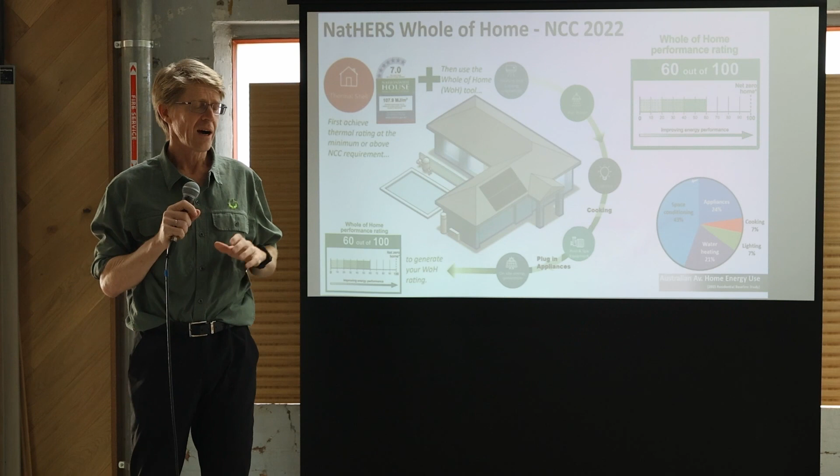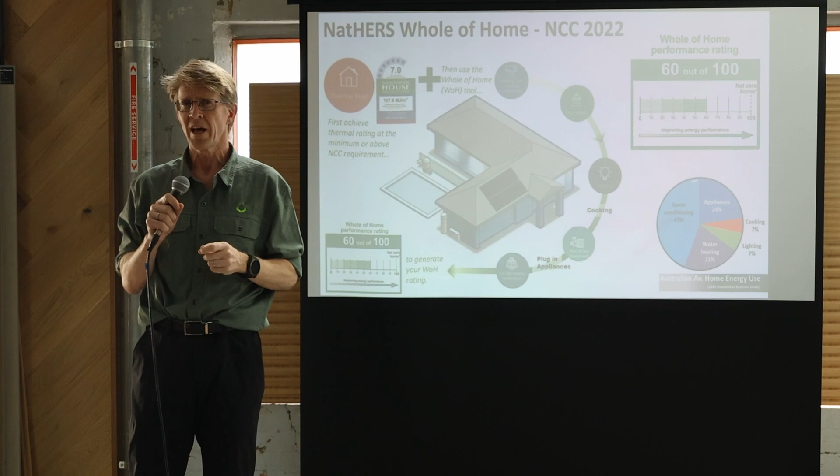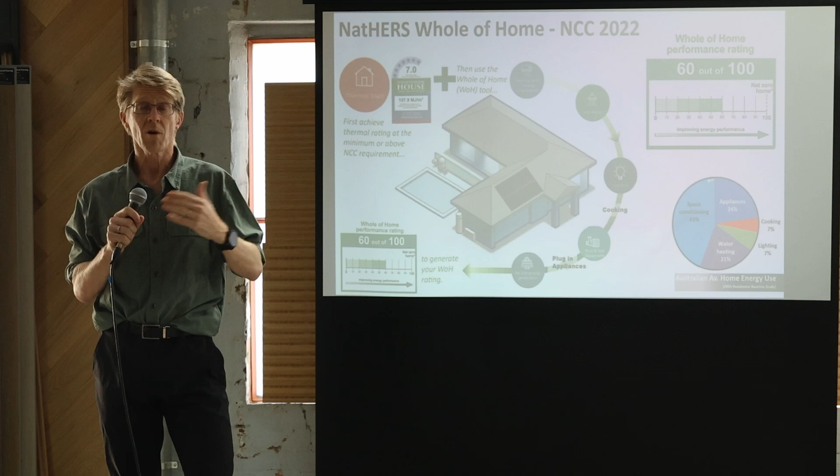Next slide. Maybe even next slide. What I want to talk about today is 2 things. I want to talk about what's coming in May, which is 7-star whole of home, NatHERS whole of home, and why that's useful, how you can use it to leverage to produce net zero operational energy homes. That's a home that produces as much power as it uses. And where you can get resources through the Sustainable Builders Alliance that will give you all the information that you need to thrive in what is quite a difficult system, with a lot of moving parts to it. I'll go through some of those moving parts.

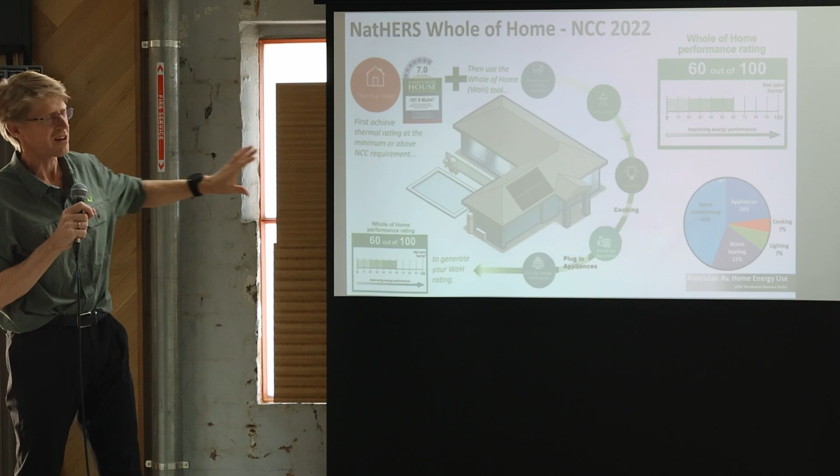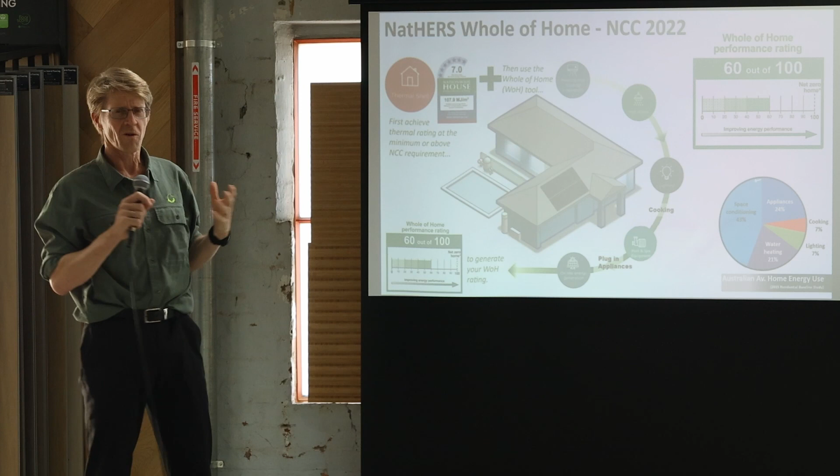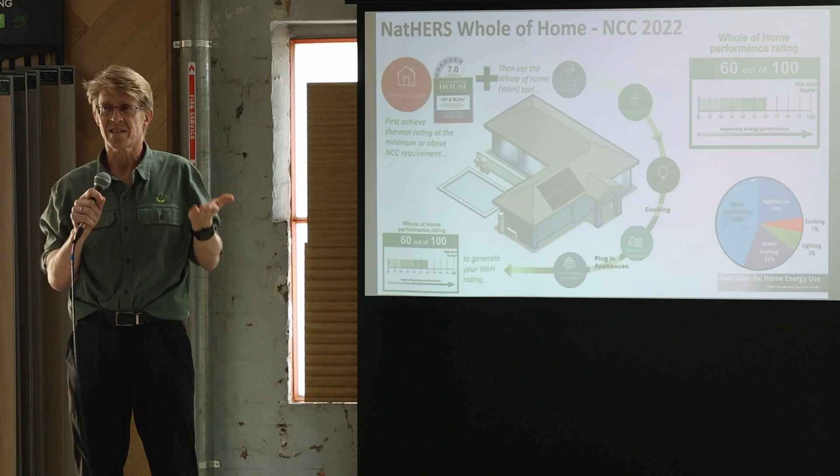Now, there's a lot on the screen, and I know it's not all that easy to see, but let's see how we go here. What you're seeing on the left is the scheme. All that NatHERS 7-star whole of home is, it's just the combination of 7 stars. So we're moving from 6 stars to 7 stars. Most of you will be aware with the star rating system. 6 stars to 7 stars, and I know there's a bit of angst in the industry about that, which I'll touch on shortly, but that's one half of it. And the other half is looking at the major appliances, fixed appliances in the home, and putting those into the calculation as well, because at the end of the day, it's the appliances that use the energy in the home.

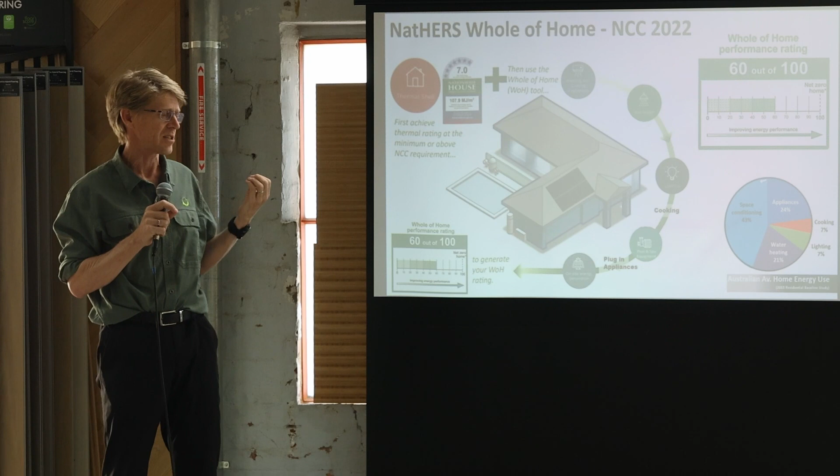If we want to know how much energy a home is using, then we need to have those details in the calculation as well. And from the government's point of view, what they're trying to do is lower the energy use in the home, because energy use is directly proportional to how much carbon dioxide is released into the atmosphere.

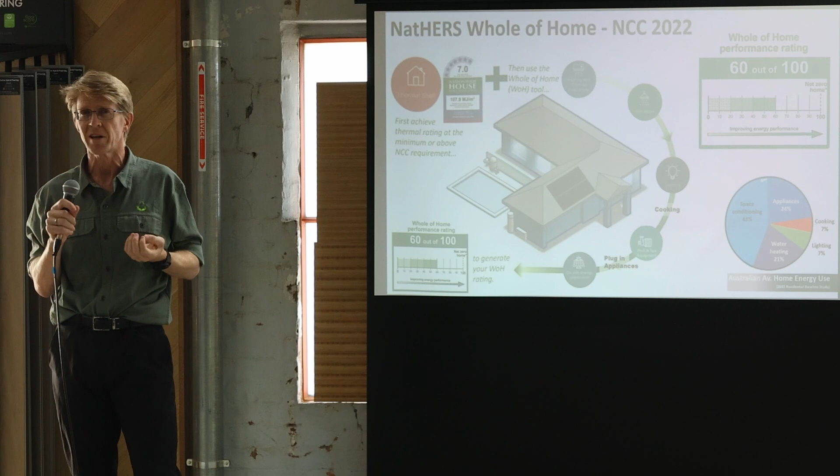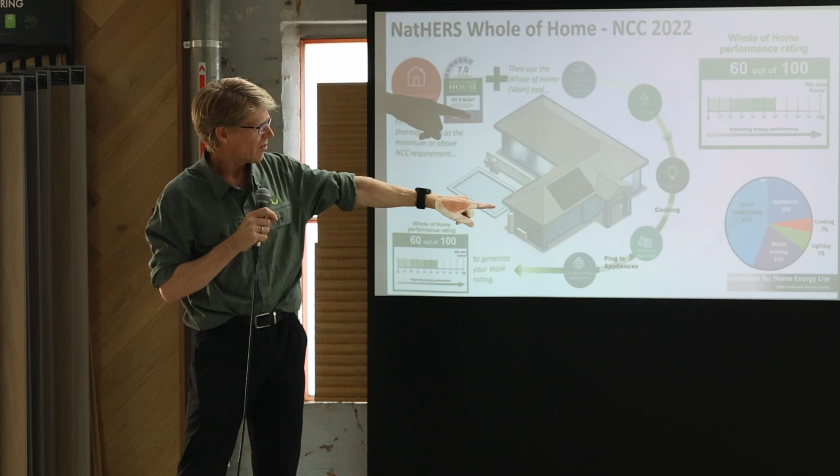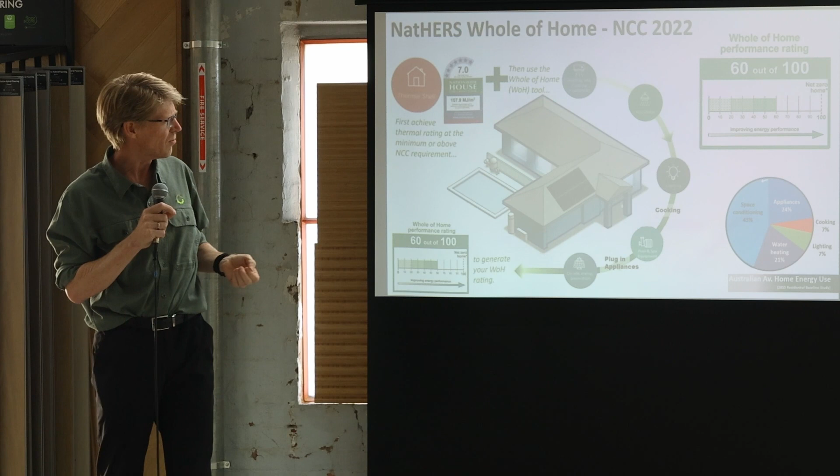If you're drawing most of your energy out of the grid or burning gas, you're using fossil fuels. If we look down here on the right, you can see a pie graph - this is what the government is trying to minimise. If you took all the homes throughout Australia, averaged the existing and new homes together, and looked at where their energy was used, that's what you'd get. The big wedge is space conditioning, heating and cooling. The purple wedge down the bottom, also quite big, is hot water. The blue top wedge on the right is general plug-in appliances, and then you've got lighting and cooking - those are the smaller wedges.

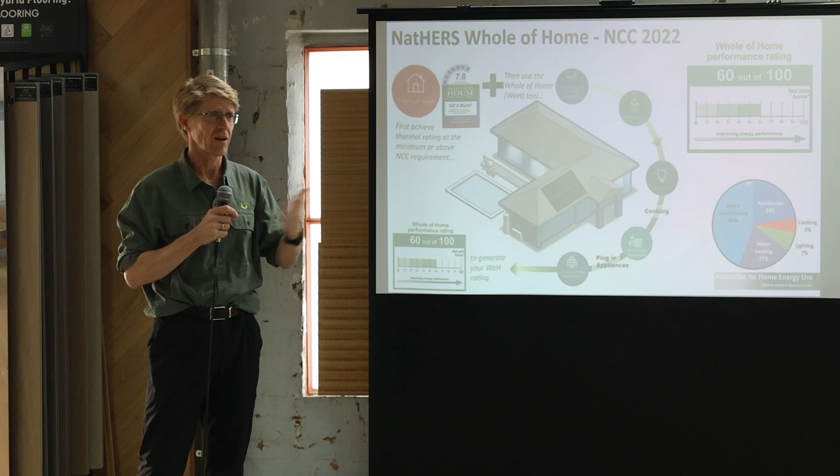The government wants to minimise the energy used there because burning fossil fuels to facilitate the functions in each wedge releases 6 tonnes of carbon dioxide into the atmosphere - each house is attributable to 6 tonnes being released every year. In Victoria it's a bit higher because we use brown coal and have to transport our power a long way. Considering a house can last at least 50 years, that could easily be 300 tonnes of carbon dioxide released, heavier than the weight of the house itself.

This is a tough problem for the government to solve in trying to lower Australia's carbon emissions. The good news is we can get rid of just about all of that today, and that's what the Sustainable Builders Alliance is about - providing information on what technologies to choose, how to use the software schemes we've had to minimise energy, and then produce power on site with photovoltaics to match what you're using, getting rid of that emission today.

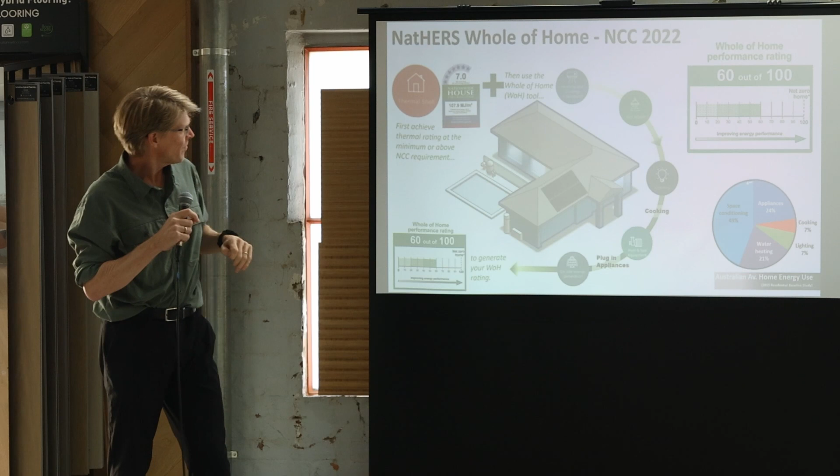Now, the scheme itself - I'm a long-time builder and long-time thermal performance assessor since the scheme came in in 2004, and I'm also involved with a fair bit of design. So as an assessor, this is what you now need to put on the plans for me, or someone like me, to rate.

There's a lot more information now that you're going to need. First, you're going to have a design getting up to 7 stars, and I'll show you where to get information on how to do that later. There's a lot to communicate here - the first thing is the space conditioning plant.

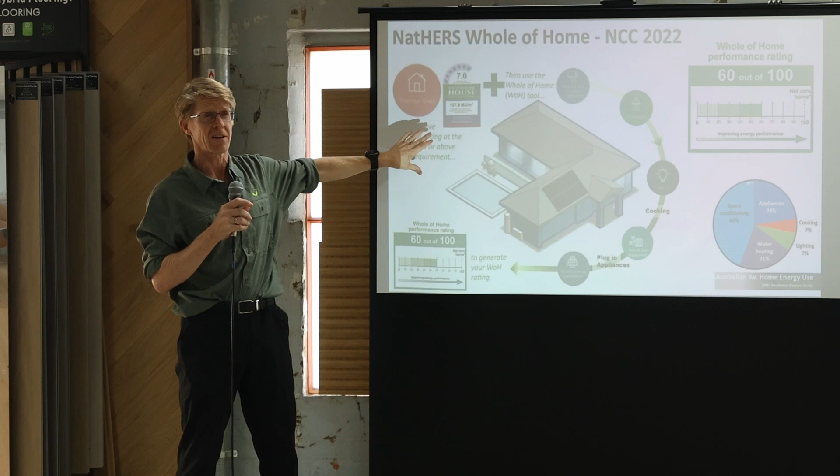If we're trying to minimise space conditioning energy that a house uses, you want a house that doesn't need much to begin with because it's designed well for the climate. Plus, you'll want to look at the efficiency of the heating and cooling plant you put in. Those two things together determine how much energy is in that big wedge.

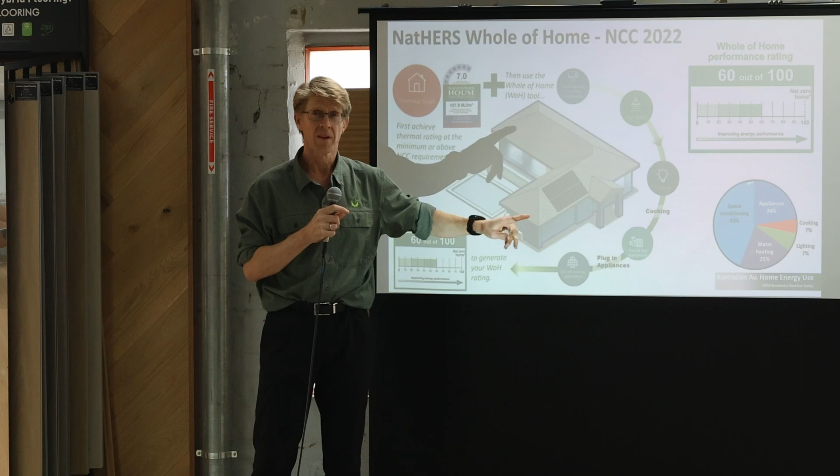The next bit of information that has to go into the software for the energy rating is the hot water system. An efficient hot water system can supply the hot water needs of the house, shown in the purple wedge, with about half the energy needed - so a saving of about half that wedge.

If you get to 7 stars and choose an efficient heating and cooling system for that big light blue wedge, you can save about three quarters of the power needed to run a home - running it with about a quarter of what's needed for that wedge.

For lighting, you now need to put on the plans how much lighting in watts per square metre - the number of lights times the bulbs gives you the energy a home uses for lighting. For cooking, the amount of energy is affected by your choice of cooktop and oven, though it has a small effect overall.

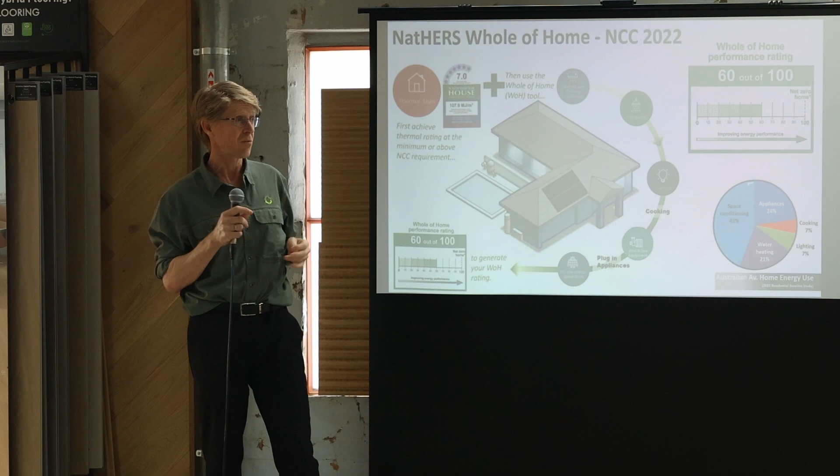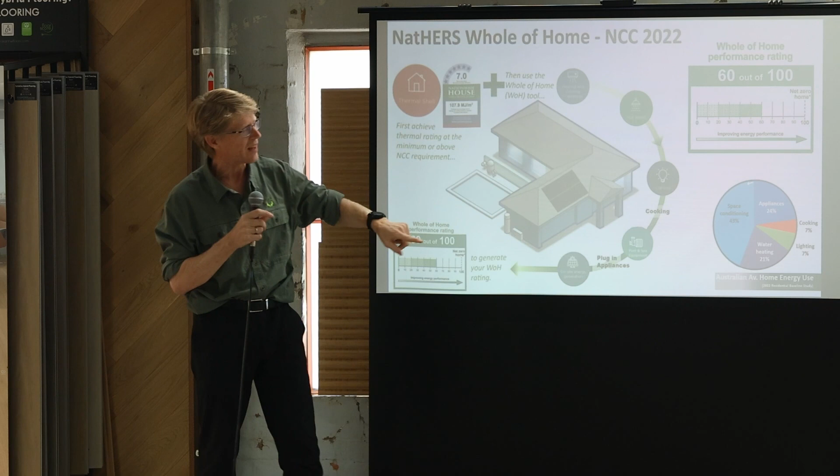Then there's appliances - but before that, there's one factor beyond the pie graph, which is pool use, because pools can use a lot of energy. At the moment it's just looking at the pool pump or spa pump as well.

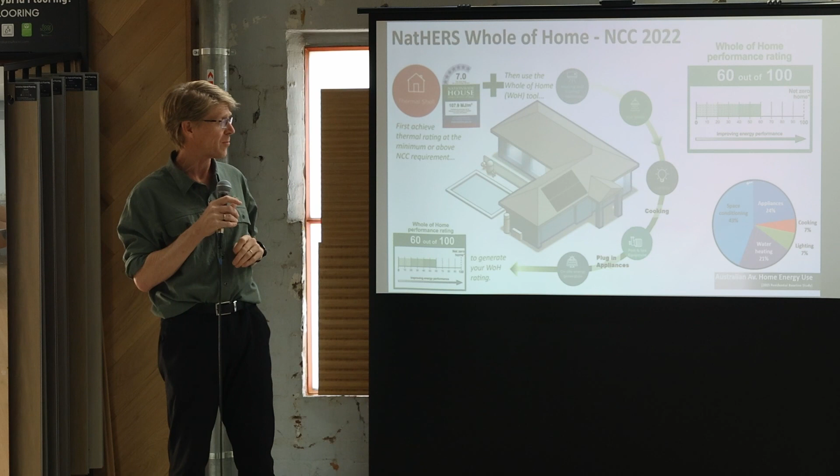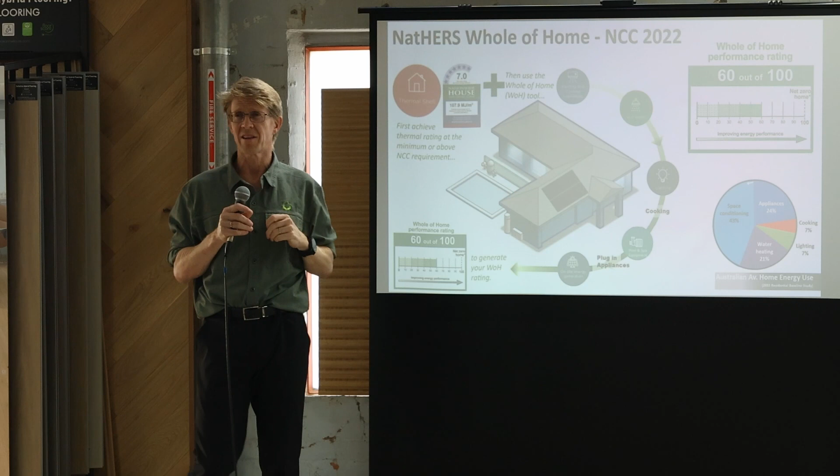They get put into this system. It's not currently looking at heating pools, which use a huge amount of energy, but my guess is they are looking at the calculations that would be needed to underlie that. So that may be coming into the system down the track.

For plug-in appliances, you don't need to put in any information. The software will just assume an average amount for plug-in appliances, working on square metres, like an average amount per square metre of house. So bigger houses will typically have more things plugged in and use a bit more energy than small houses. The system does give a little bit of advantage to a small house for once, which is nice. And lastly, the system gives a credit if you're producing power.

If you're producing solar power, that will also go into the calculation and give you a credit.

Once you put the information about the models of the appliances into the software, it then does a calculation over a year. So for every hour, over 365 days, it will call up the weather data, predict the temperatures, see where heating and cooling is needed, and work out how efficient your heating and cooling is as to how much power that takes. It'll look at people having showers, turning on lights when the sun goes down, living in the house, the pool pump running, and sun shining on the roof producing power if you do have photovoltaics. You don't have to have them, but if you do, it will give you a credit. And it'll work out how much energy the house uses over the year.

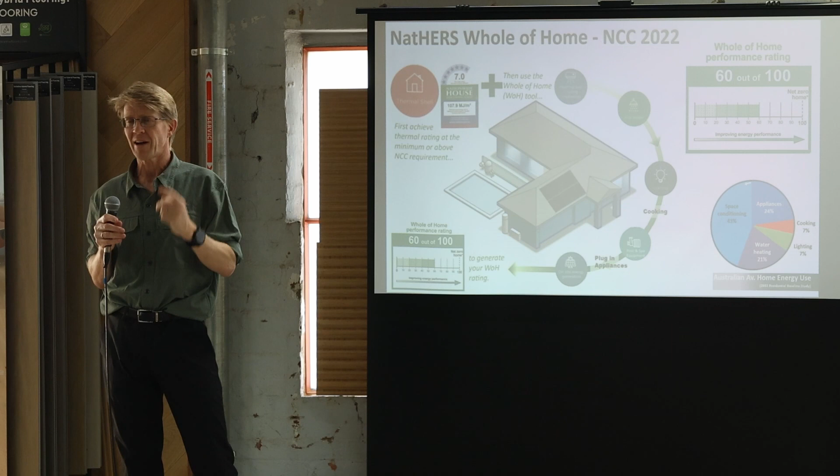In the past, we just had a star rating system that gave some idea of how well the house would heat and cool itself, but it wouldn't give you any real idea of how cheap or expensive it was to run a house. Now this new system includes that.

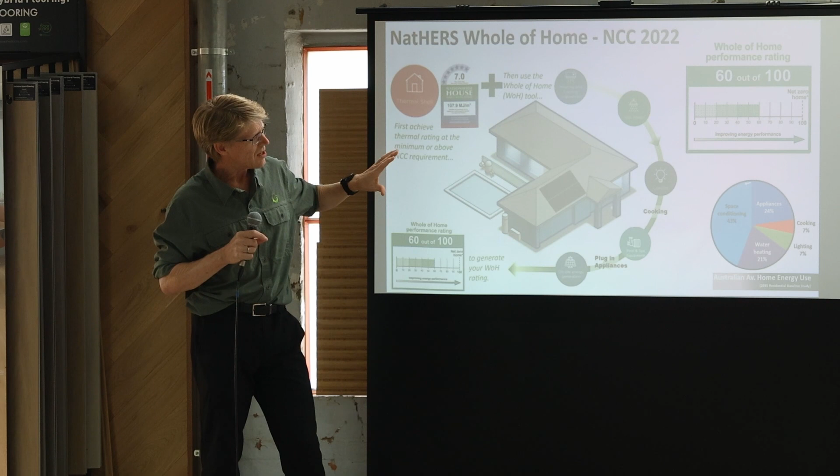So how do you pass? Maybe you can forward through until I say stop. Keep going, keep going, keep going, keep going. Stop. Back one. Okay, how do you pass?

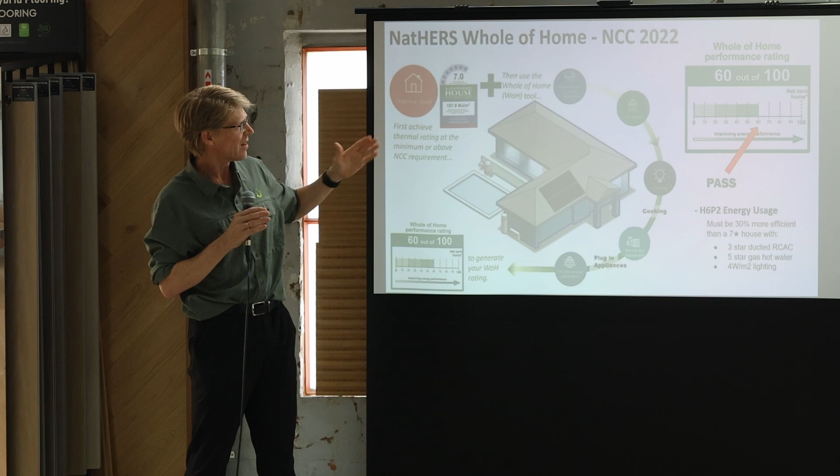The software, as well as rating how much energy your house uses, does a second rating in the background, which they call the default 7-star home. What it does is take your home — now your home might be 7 stars, but it might have been 8, 9, or even potentially 10 stars — and it dumbs that back down to 7 stars. Then it takes out your chosen appliance suite and puts in default appliances: a 3-star ducted reverse cycle air conditioner, 5-star gas hot water, and 4 watts per square metre for lighting, and then runs the simulation.

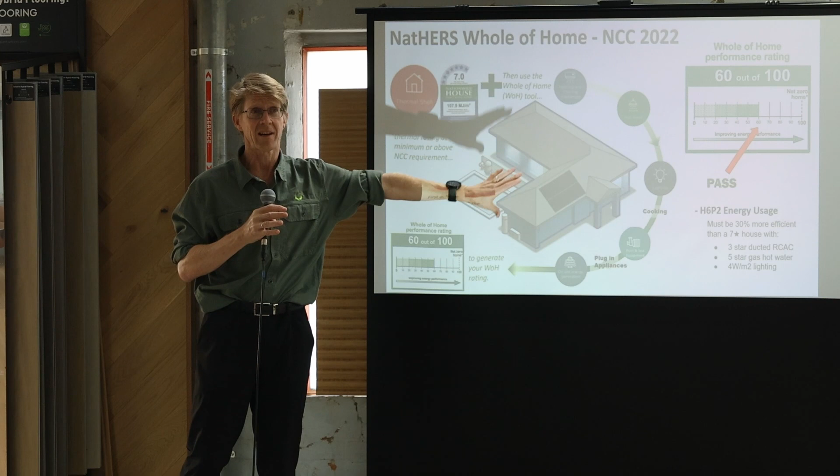Under National Construction Code clause H6P2, your home with your chosen suite and star rating is required to use 30% less energy than your house at 7 stars with those default appliances. So that's how the system works.

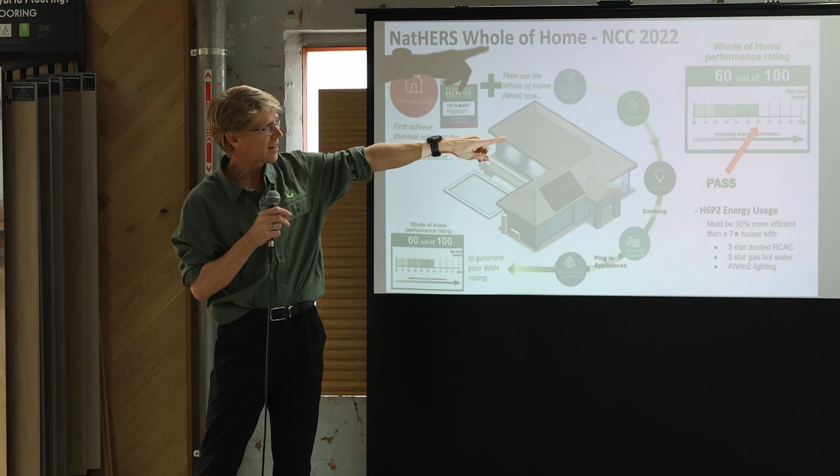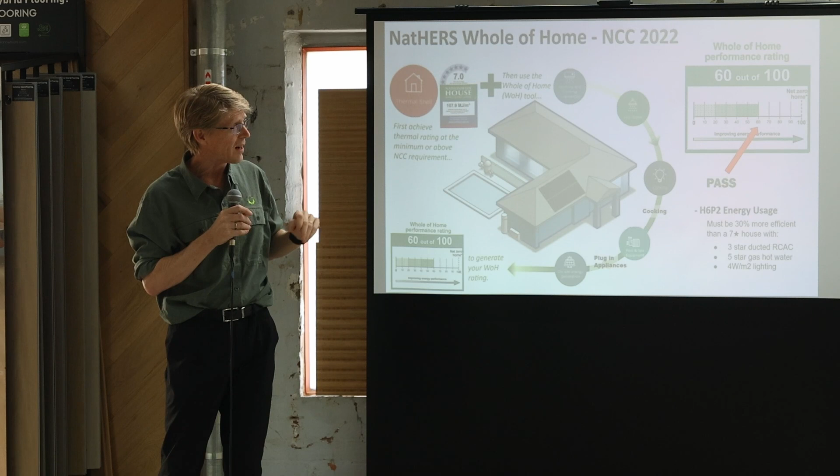If you do that, you'll see on the new report, as well as a star rating, a sliding scale from 0 to 100. 60 is a pass, so if you're 30% less energy use than the default home, you will pass. But what I do want to show, on the next slide, is right along the end of that scale, there's something that says net zero home.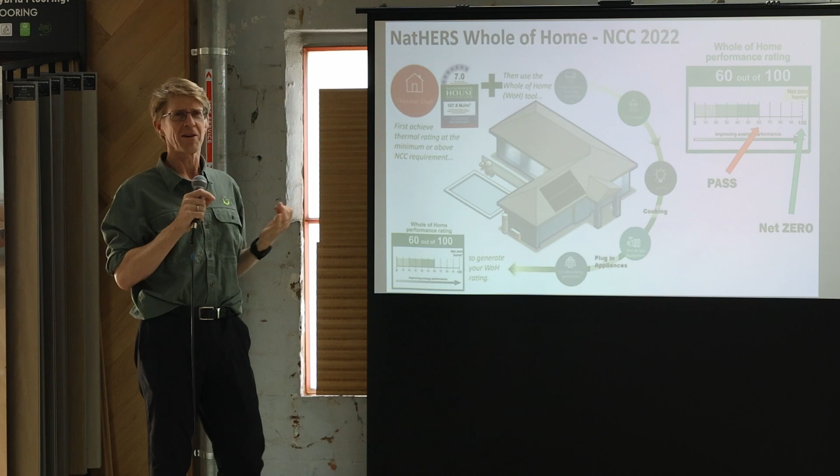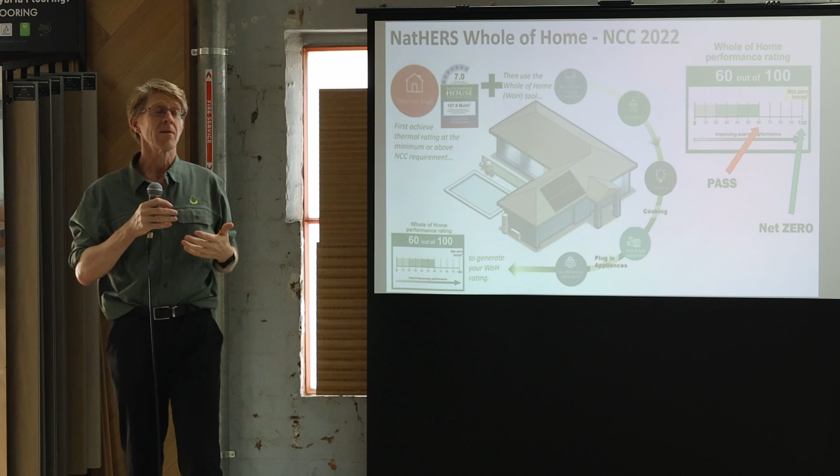These are two really important words that most people don't know are there now. This is in software referenced by the National Construction Code that now gives a pathway to designing up to net zero. So if you get the right mix of star rating, appliance use, and solar panels on the roof, you can produce a home on the ground that generates as much power over the year as it uses.

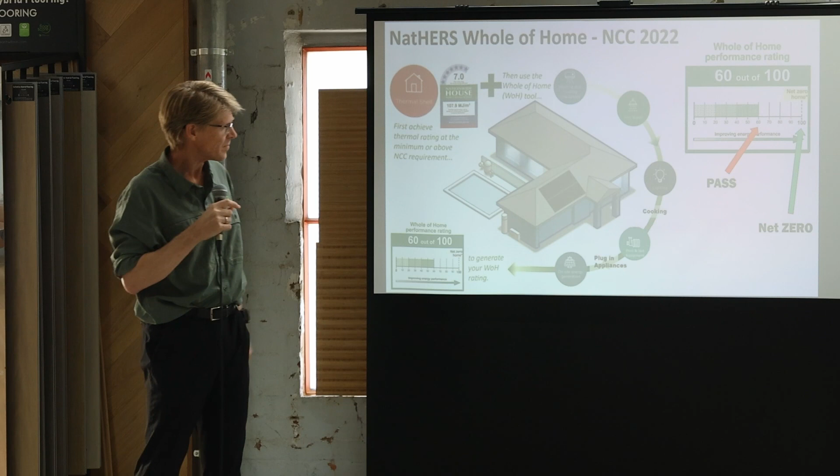All right, next slide. Okay, so how do you do well under this system? How do you thrive under this system? There's a lot of information that you need to put on the plans.

This is the website — you can't see it all that well, but this is the Sustainable Builders Alliance website, thesba.com.au. I'd encourage you all to go and have a look at that later on today or whenever, if you haven't already. Next slide.

On that, as well as our fantastic webinars by Hamish over there, who's one of the directors of Sustainable Builders Alliance, the archive for all our webinars there, we've got 25 or 30, those are expert guests who come in, talk about design, talk about products. We also have our podcast archive, and our intrepid leader Simon runs the podcast. That's the Sustainable Builders Yak, you can listen to it on iTunes and Spotify.

As well as those things, there's also this thing called the Roadmap to Net Zero Homes. And the Roadmap to Net Zero Homes is a huge amount of practical information on what you need to do if you do want a house that produces as much power as it uses, and potentially also looks at its embodied carbon and offsets that.

But very quickly, these are the steps. This is sort of the net zero house equation, if you like. Step number one, and this is how the website is laid out to make it easy - step number one is all about good design, designing for climate, designing a house that doesn't need much heating and cooling to begin with. So that's a good first step.

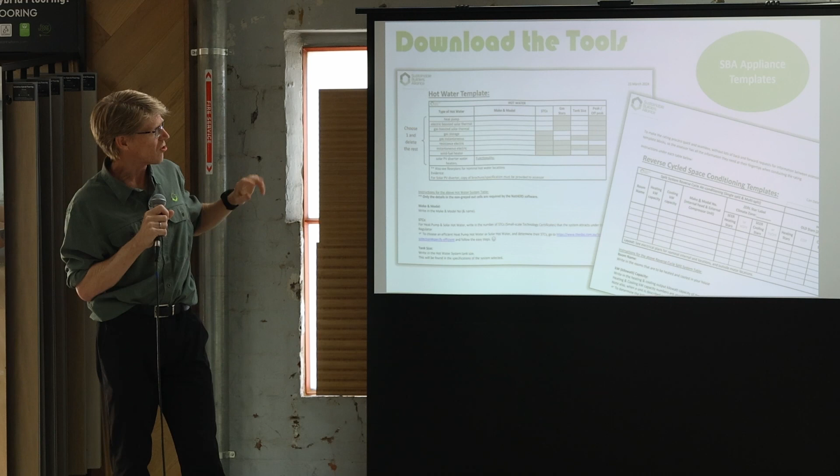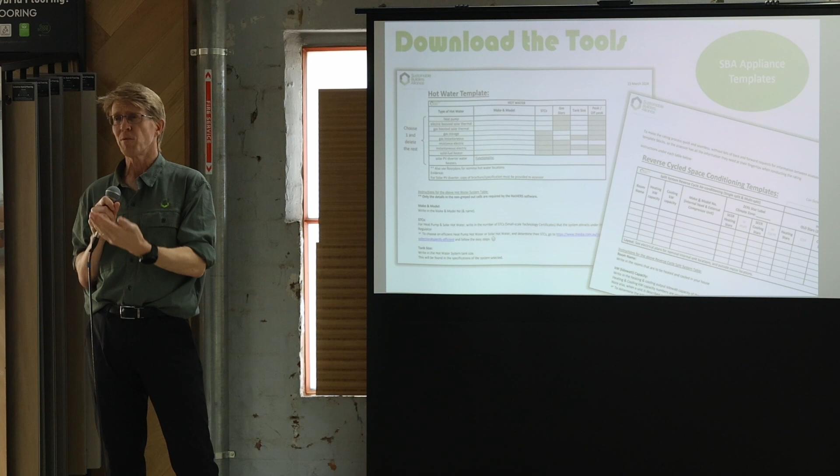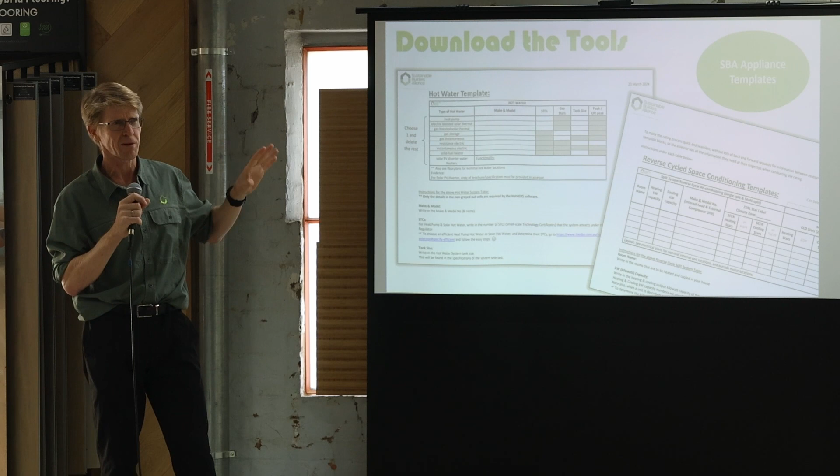The tool of choice I've been downloading from that step is these templates. They're designed to be filled out and put on the plan so the thermal performance assessor has the information they need to do the rating. How do you know at the moment what information you need to put on the plans? What model numbers do you need? Do you need energy specifics? These templates have all the answers and instructions on how to fill them out. You simply fill out your appliances, put them on the plans, and that helps the process go smoothly.

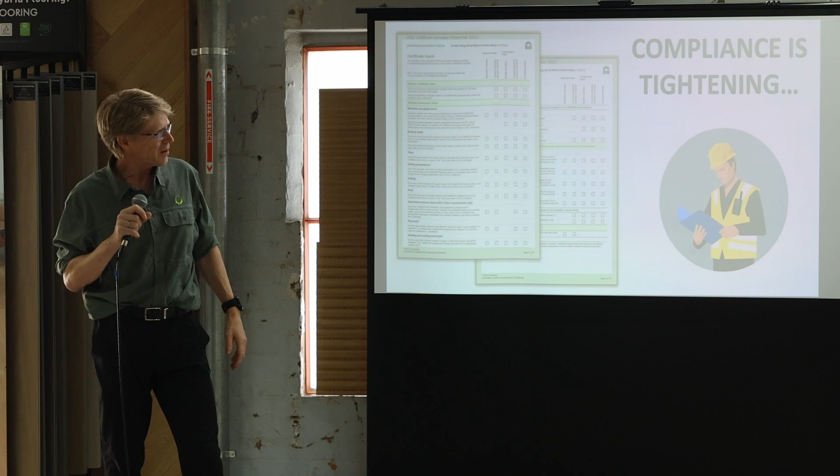Step 5 is everything you need to know about putting on photovoltaics. There's a template coming for that too, but I haven't done it yet. I might skip to the end given the time.

There's a lot there about how to build properly, where buildings fail, how to make sure they don't fail, and there are quality assurance checklists on there. But the last thing I'd like to say - we're trying to get the message out, but education is only one part of what we're trying to achieve.

To actually make change, we need a foot in the door, we need to be at the tables when decisions are made, offering up the builder's perspective, the designer's perspective on things. And to do that, we need people joining the Alliance.

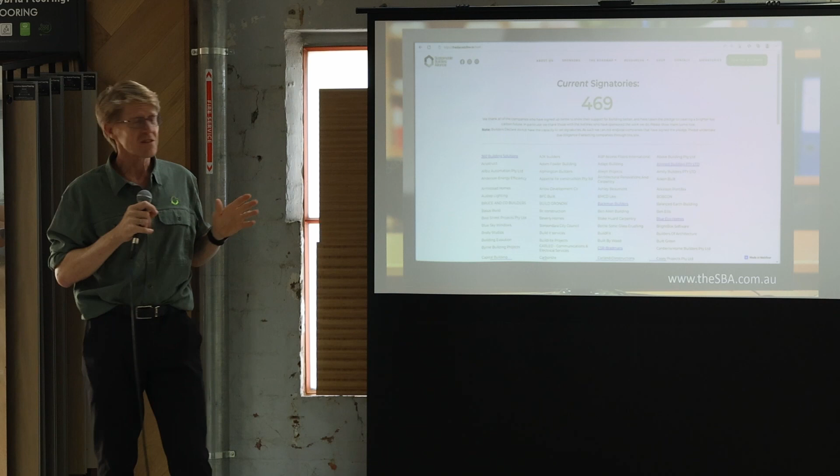At the moment, 469 companies - builders, designers, assessors, suppliers who think we can do better - have signed up. I'd encourage you, if what I'm saying today resonates with you, to consider signing up.

Or better yet - we've got big ambitions for where we want to go with Sustainable Builders Alliance, but we can't get there alone.

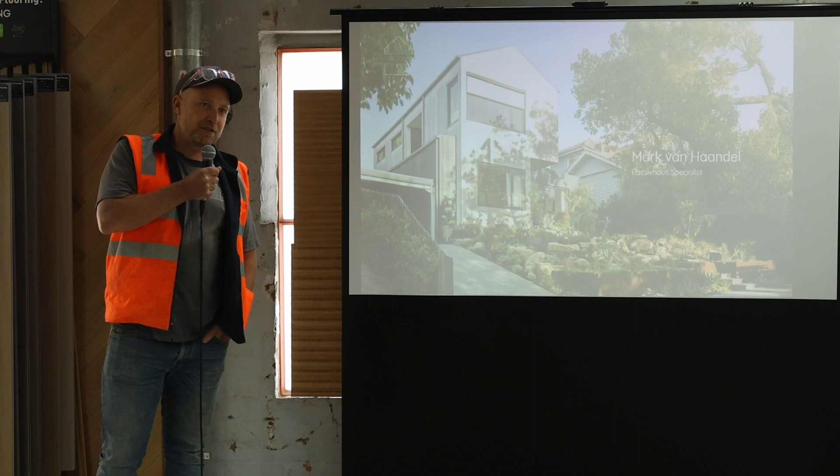I'm going to be covering a little bit more focused on passive house construction, which we do a lot of. For those who don't know much about passive house, this will be an introduction to passive house, and also a chat about why passive house is important in our Australian environment, because there are a lot of myths and misconceptions that it's only a European product that only performs overseas. Secondly, we'll get into sustainability and recycling, and how you can make your job sites better and improve your waste management.

Let's do it. Firstly, I'm just a builder. Anything I say today isn't necessarily project specific. You need to go away and look at what I've spoken about and how that reflects on your projects, and model your projects as well. What's right for one job is not necessarily right for another job in terms of insulation, windows, all that. So do your research, speak to the right people, and use this as a guide, a platform, or a stepping stone of where you need to go.

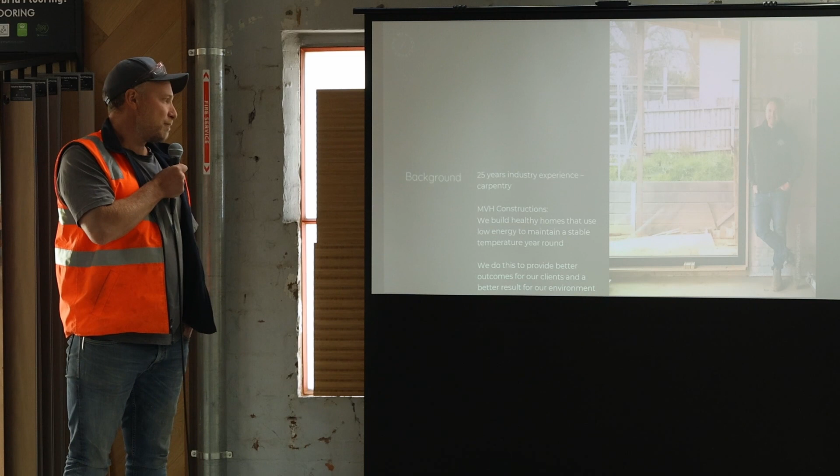I have 25 years experience in carpentry. We build healthy homes that use low energy to maintain a stable temperature year round. We do this to provide better outcomes for our clients and better results for the environment. All we build is this style of home. We don't feel we can confidently give our clients a good product without meeting the benchmarks that we try to.

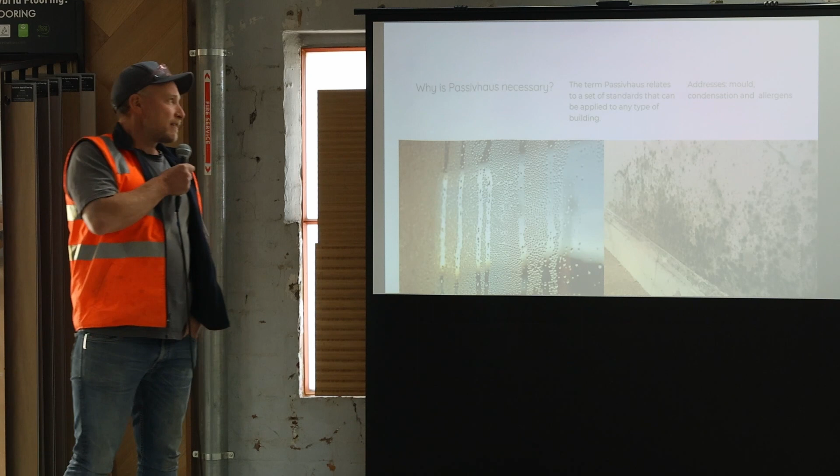Why do we believe Passive House is necessary? The term Passive House relates to a set of standards that can be applied to any type of building, and they address mould, condensation, allergens, and sick building syndrome. So why are we like this now, and why didn't we used to be like this a long time ago? I think with the energy NCC moving up, people insulating homes, and all of a sudden closing in homes and increasing air tightness, without implementing other things we can actually create more of a rod for our back and more issues than that. So we do need to implement the full range of assets we've got to achieve the right outcome.

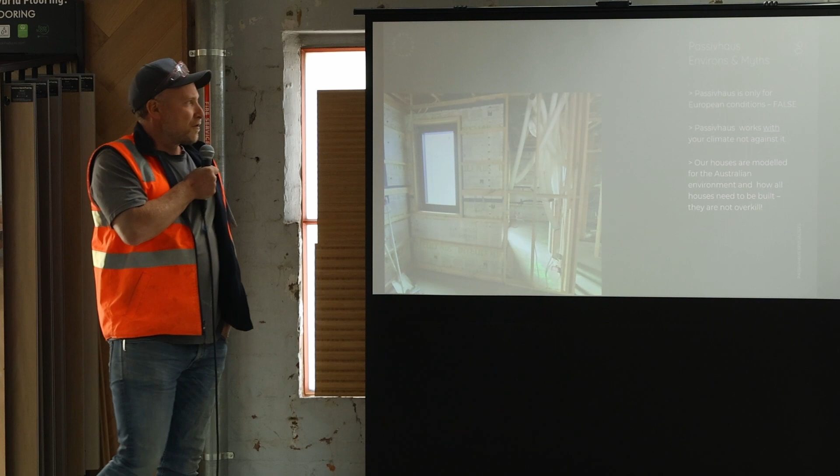Passive House was developed in Europe in the early 90s. To put this into a nutshell, the Passive Houses we build here wouldn't perform overseas. They're built for our climate and our weather patterns, and they wouldn't perform in the northern hemisphere. So when people say it works overseas in extreme climates, that's a different Passive House to what we build here. If anything, Passive House is what you should be building, or Passive House principles.

For those who don't know, a Passive House is based on 5 principles that are modelled to suit the climate and data of your region. These principles form the core structure of your house and the linchpin to achieving a successful outcome. Just like a table - and a friend of mine, Sven from Maxi, uses this analogy - a Passive House needs all 5 components to function, just like a table missing a leg. So people who say they're using Passive House principles can be in a bit of danger if they're using some and not all. A table probably wouldn't work with only 3 legs. If you make your house super airtight and don't look at ventilation, relying on open windows, you might be in a bit of trouble.

The 5 key principles: airtightness, mechanical ventilation, no thermal bridges, high performance windows, and superior insulation. Number 1, window types - we might skip through this because most people know what the different windows do. We've got aluminium clad, UPVC, thermally broken. A window is a hole in your insulation layer, so there's no point putting really high levels of insulation in your walls and then having this hole in your wall and not treating it with respect. Just because a window is double glazed doesn't mean it's the same as the next double glazed window.

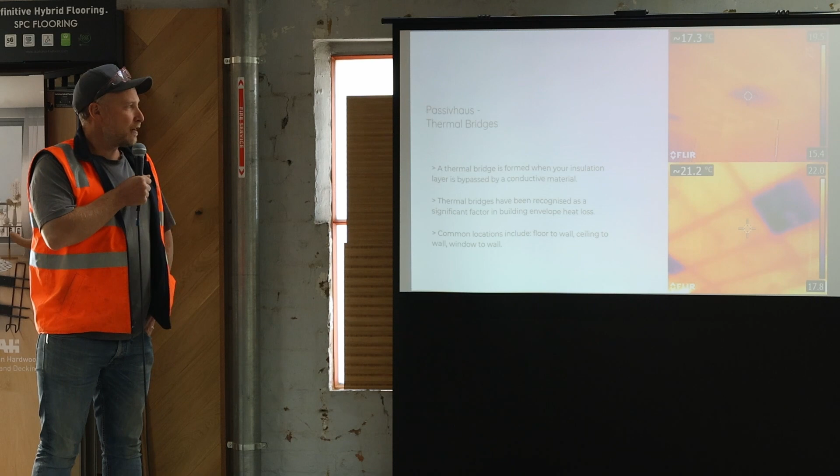What a thermal bridge can do in your home is like pulling a beer bottle out and putting it on your kitchen bench. It comes out dry, and as soon as it's in a warmer atmosphere, you watch the condensation develop on it. That's similar to a window frame. If it's not thermally broken on the outside, that coldness can come through to the inside warm temperature and condensate. It's also condensating around the window in places you don't see.

Same with steel beams. An example of the steel beam is here. We've got a cantilever outside of the house. As that's exposed on the cold layer of the house, that heat is going to pretty much travel up a highway into the house, and above your plaster and below your floor layer, you're going to have condensation developing.

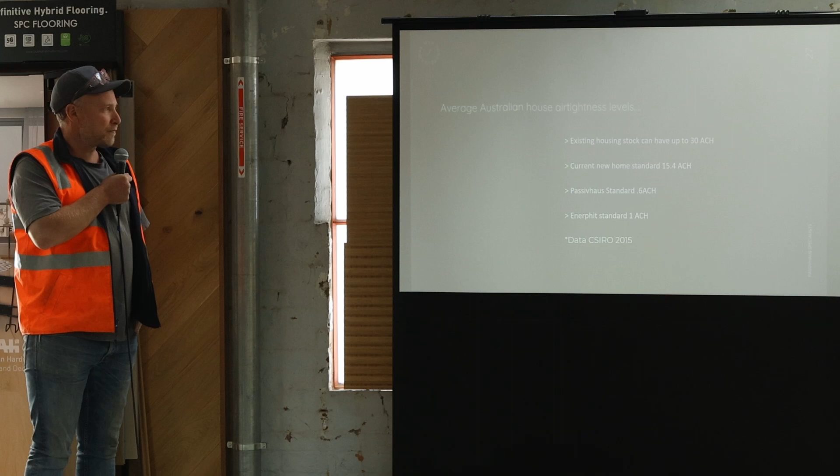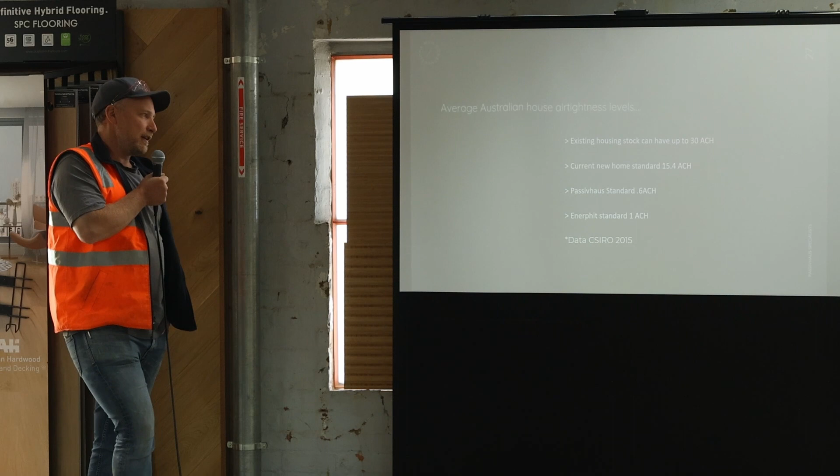Number 5, air tightness. As we bring all these in and build up the air tightness, we need to manage the ventilation. They say the existing housing stock can have up to 30 air changes per hour. Current new home standard is roughly 15.4. Passive house standard is 0.6, and EnerPHit standard is 1.

The benefits of an airtight home: improved energy efficiency, no wind washing on insulation. It's all good putting really good insulation into your home and saying I've got R6 in my ceiling and R4 in my walls or whatever else, but unless you protect that insulation like a polar fleece jacket and zip it up, you can actually reduce the effects of your insulation by about 40%.

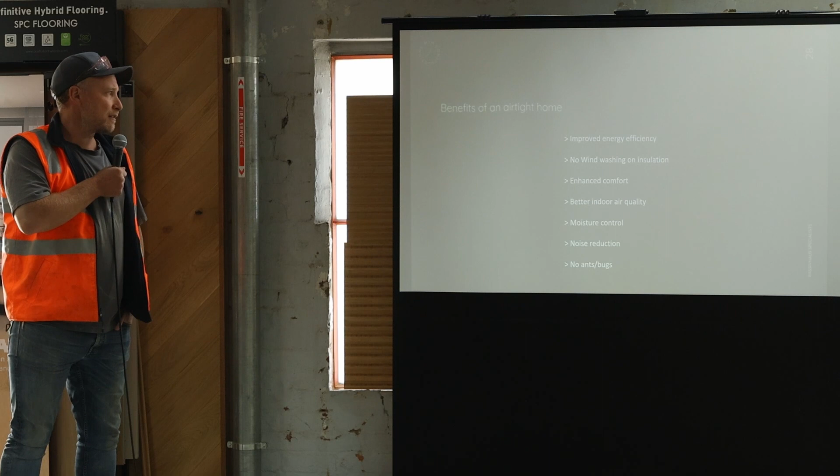Enhanced comfort, better indoor air quality, moisture control, noise reduction, no ants or bugs. You've got a jacket there - when your jacket's open, it's not doing a whole lot. You zip it all up, and all of a sudden you've got a nice warm layer around your body. Go for a run though, and all of a sudden you're sweating on the inside of that jacket. So you need to manage that moisture, but you need that continuous layer of insulation.

Blower door test, that's how we test to get this air tightness result. Remember, if you are trying to achieve a super tight house, houses achieving air tightness of less than 5 air changes per hour do require a ventilation unit.

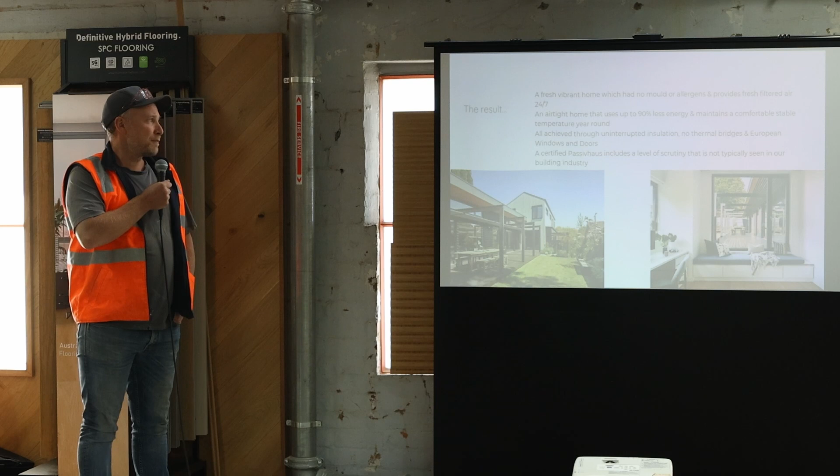So the result is a fresh, vibrant home that has no mould or allergens, provides fresh filtered air 24/7, an airtight home that uses up to 90% less energy and maintains a comfortable, stable temperature year-round, all achieved through uninterrupted insulation, no thermal bridges, and good windows and doors - that's an old slide, sorry.

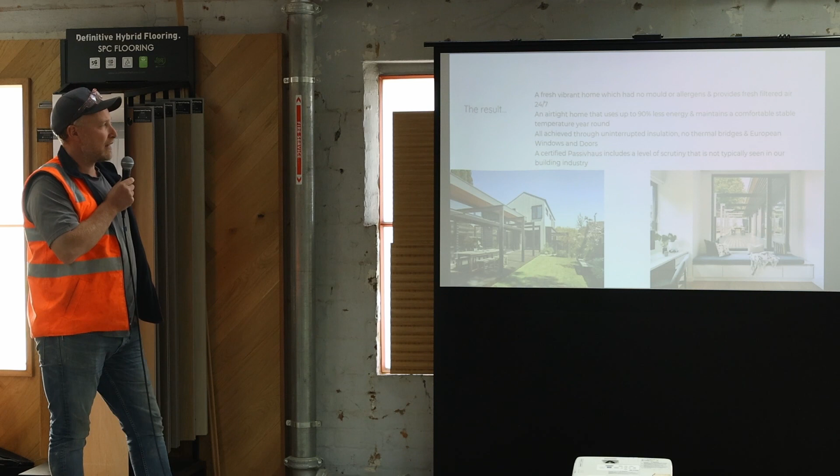A certified passive house includes a level of scrutiny that is not typically seen in our building industry. If you need to know more or want to find out more, the resources are Australian Passive House Association, Passipedia, and Passive House Institute.

Open days are a great way to go and see results and actually speak to people who live and feel these houses, and it's probably the best way to actually be able to appreciate the difference of it.

I'm looking at Hamish because he helped coin some of this.

So now moving across to recycling. I skimmed through Passive House there because a lot of people don't subscribe to the Passive House theory, and it's not necessarily the end-all or be-all. That's just pushing the way that we like to build a house. You don't need to build that way to be compliant, but it works for us.

One thing over the past few years that we've really tried to pick up on is our waste management. Some facts for you: the construction and demolition industry is the second largest waste producer in Australia. 25.2 million tonnes go into landfill per year, which equates to 38% of all waste products across the board. This waste generation has grown by 39% over a 15-year period, and a large proportion of this waste is recyclable.

It's time for change. We can recycle soft plastics, asphalts, bricks, concrete pavers, ceramics, plaster, the list goes on, and every week I meet with or speak to people who are bringing something else out. So it's changing ever so quickly.

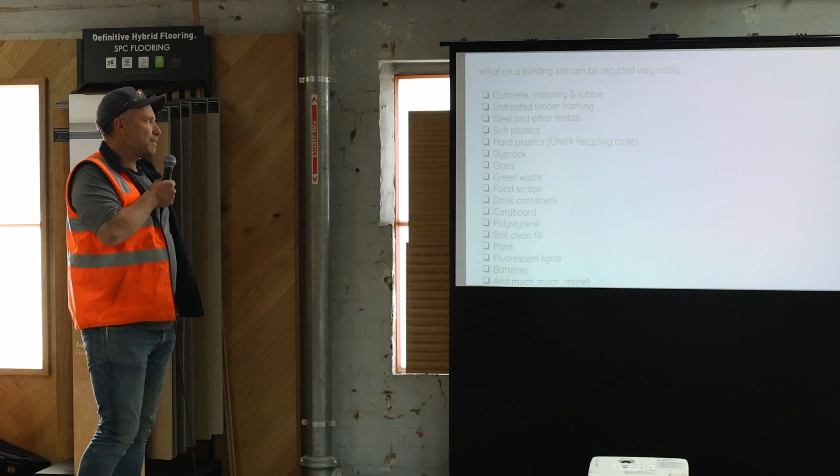Some stuff can be recycled on site very easily, and again the list is endless, but you'd be surprised: concrete, untreated timber, steel, soft plastics, hard plastics, gyprock, glass, green waste, food scraps, drink containers, cardboard, polystyrene, paint, fluorescent lights, batteries. Everything generally has something you can do with it.

This is one we haven't pushed too far — it's sort of a pipe dream, but how we think we can fast track this, and now that I've got City of Yarra's ears here, I included it. The potential is we need to get everyone involved. Developers and people like that aren't going to listen unless there's an incentive for them, or unless they see their sale prices increasing. One way we think it might change quicker is if, when they're going for their planning permit process, there's a way they can skip the queue.

Or get fast-tracked with their permit a little bit if they show waste management and sorting facilities in their plans, along with potentially the building standards of what they're building. So if somebody can give with their planning permit a deconstruction plan and say, this is what we're doing, and you tick a whole lot of boxes — potentially like being at the theme park where you get the special wristband to skip the queue and go straight to the front. Maybe you can do that, and then all of a sudden you'd look at all the developers changing their tack, saying, all right, this planning permit would have taken us a year — it's now going to take us 3 months if we actually do it this way.

I'm sure that isn't as easy as me standing up here saying it, but at least if we start having these conversations now — and hopefully those conversations have already been had in the right areas — even if it's not necessarily from the start people doing it for the right intentions, at least it's going to have that positive impact on our environment, and it becomes the norm anyway. The more people we can get doing it, the cheaper and easier it becomes for everybody else. Getting architects on board, clients and consumers aware of the waste in the industry, and making it part of their construction process.

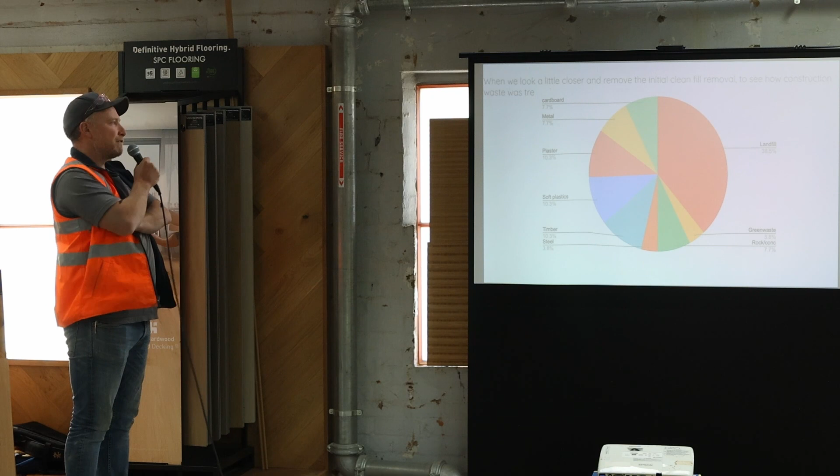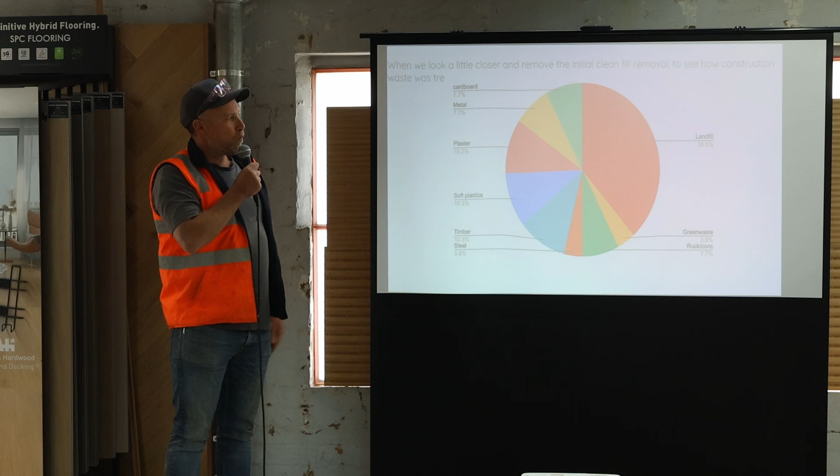If we move to the next slide, and we take out the clean fill and a couple of other things, this is actually probably a little bit more reflective of what we've done, and landfill there is at 38%. As I said, we aim for 80. At the moment, 38% is where we are with this one. I hope the next job's better and the next job's better after that again. But at least, as I said, we're trying to take some ownership of what we're doing and tracking it all to look at these and say, all right, what can we improve on and what's the good results?

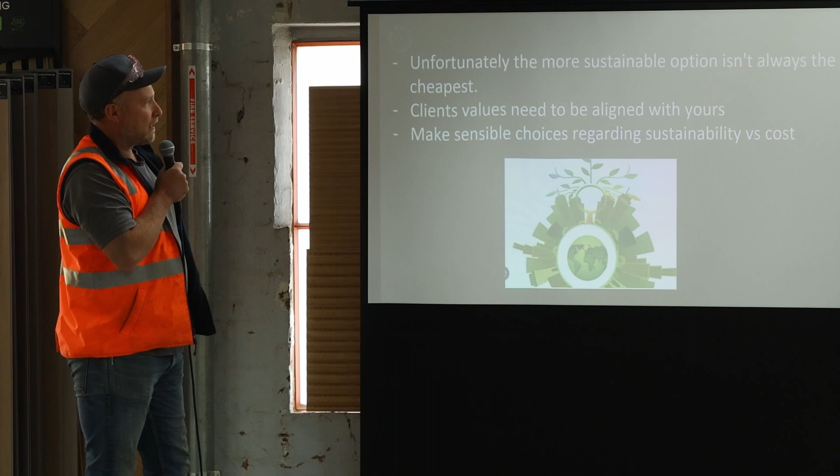Unfortunately, the more sustainable option isn't always the cheapest. Clients' values need to be aligned with yours and making sensible choices regarding sustainability versus cost. So it's all good going out there and saying we'll do this, do that, when it's going to cost your clients a shitload of money to do that. So you need to choose your battles and say, all right, it's not going to be cheaper, but you're going to lose someone's interest pretty quickly if you're expecting their build to be twice the amount than usual, just because you want to recycle something that's tricky to recycle.

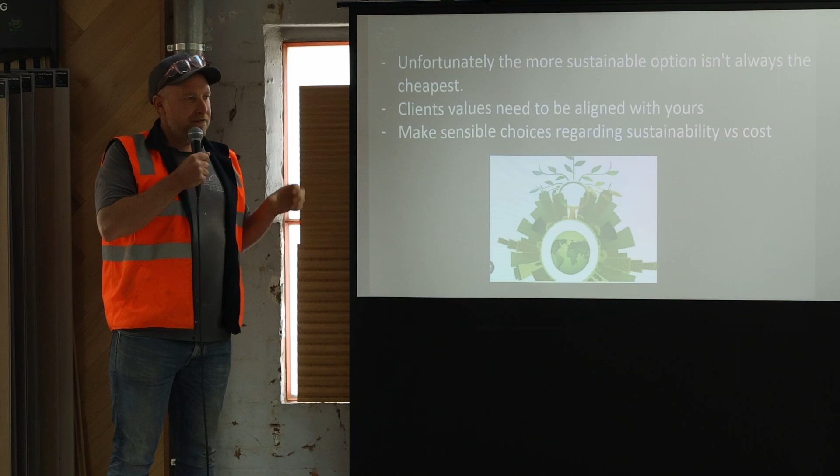So as I said, choose your battles. If you can get someone halfway there, then potentially on the next job you can get them three-quarters of the way there.

We're trying to start or push a program called Real Tradies Recycle, where we have, similar to SBA, playbooks and guides for people to follow and builders to follow, that makes it easy for them to recycle, and potentially getting in with industry that will help us recycle those things as well. So stay tuned to that. You can follow that on socials and whatever else. As I said, that's very infant and by no means as professional as SBA, but we've got a wheelie bin with a hard hat, so it's pretty cool.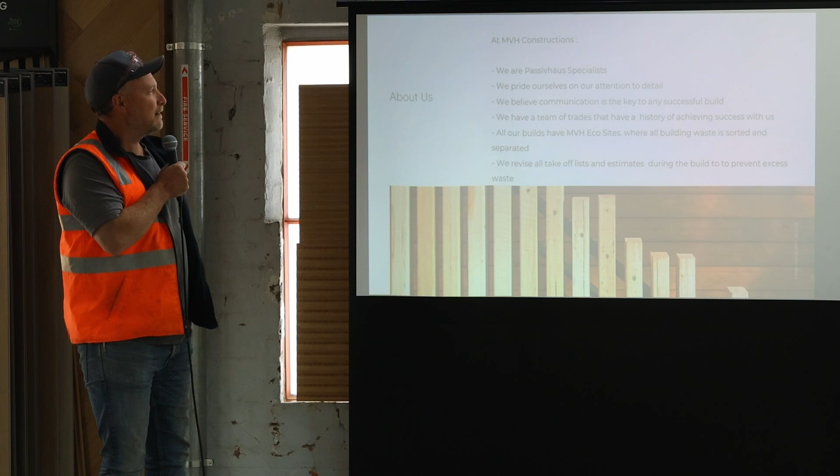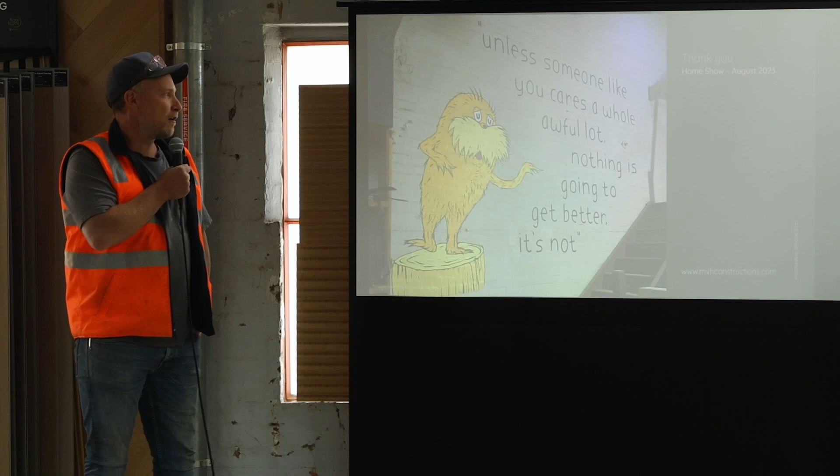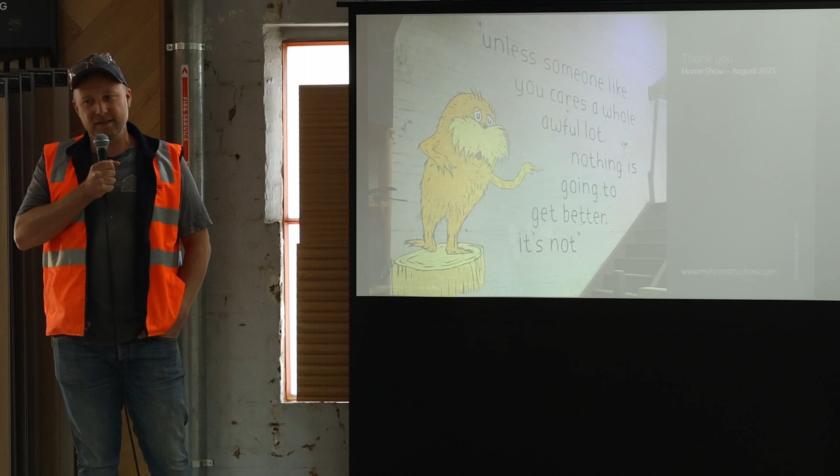As a friend of a few of ours here, Robbie from Revival says, unless someone like you cares a whole awful lot, nothing is going to get better. It's not. So as I said, we need to make the change. We need to make the difference. It's not going to happen by itself, and it's easier than you think. So we need to use this not just as a way to feel good, but actually make the planet better than its current state. Thank you.